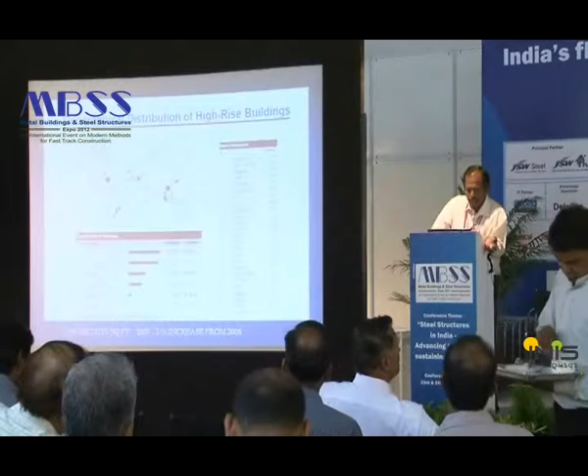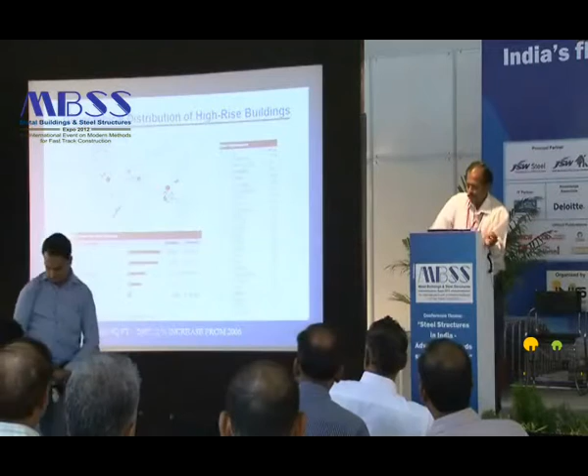And if you take an overall survey of high-rise buildings taken up a few years back, the number of buildings in concentration in Asia is the heaviest, which is almost about 33% of the whole construction industry in the world, of which if you take cities, within 25 cities in India we are ranked 23rd.

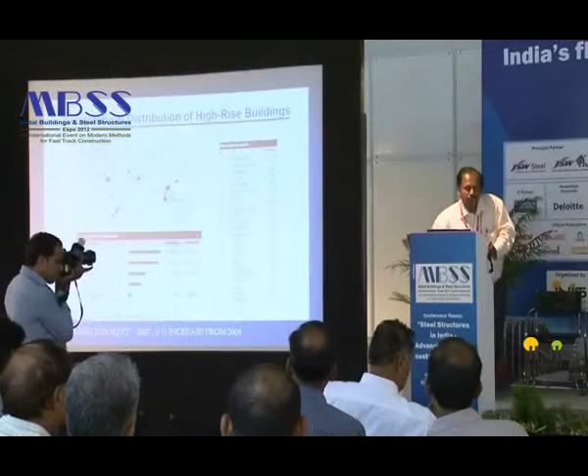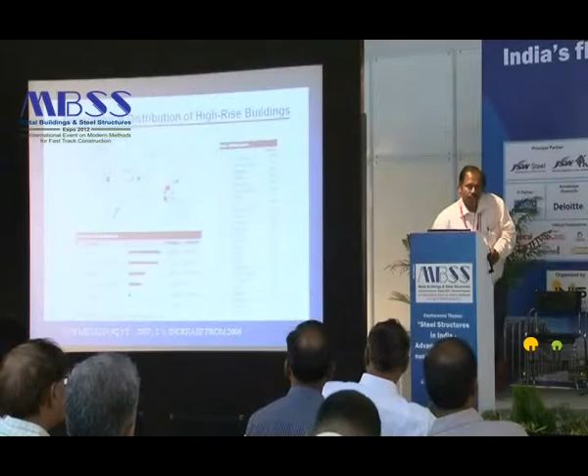It's about 470 plus towers that are estimated to be constructed, and of which, if you take commercial structures, almost everything is commercial except a few which are residential, and that is all in our present setting.

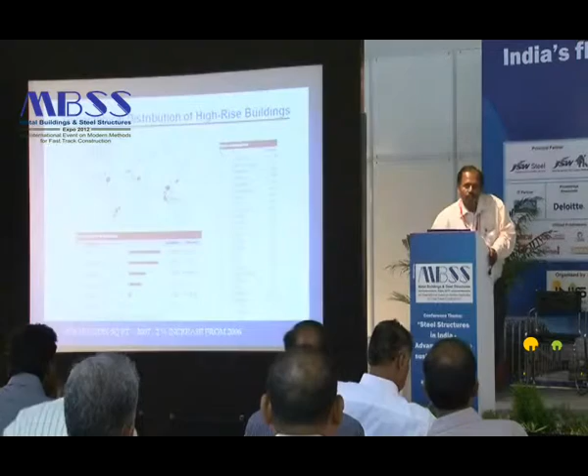The developers are right now starting to move into residential buildings in structural steel, whereas the major portion, almost about 90% of the structures, are commercial related items.

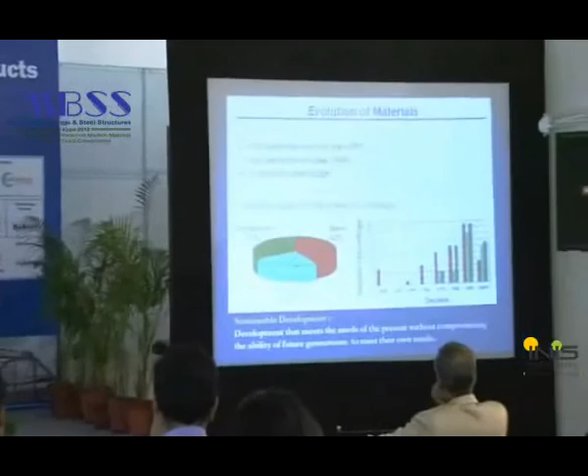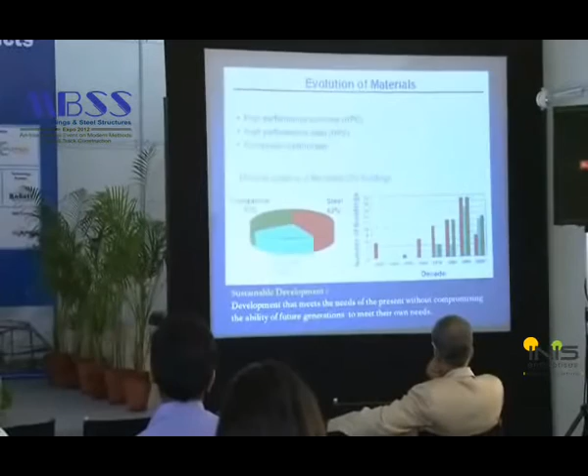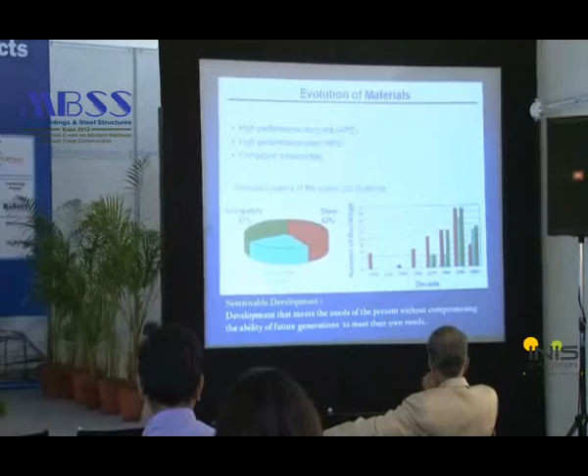And if you take material - if you see the graph or chart presented here, initially most structures started with steel way back in the 1930s, and later it was completely taken up into concrete, and in the later part, merging the two materials together, it has been taken up as composite.

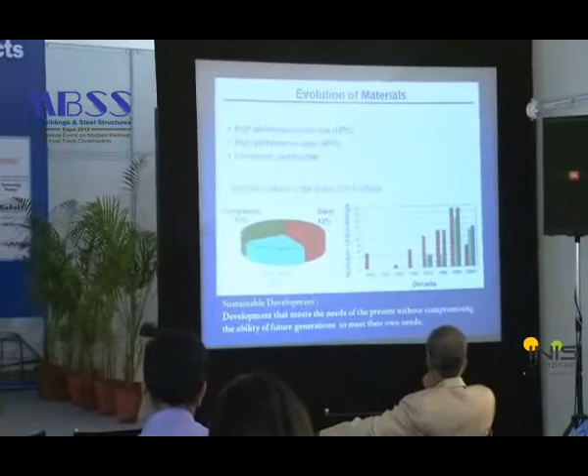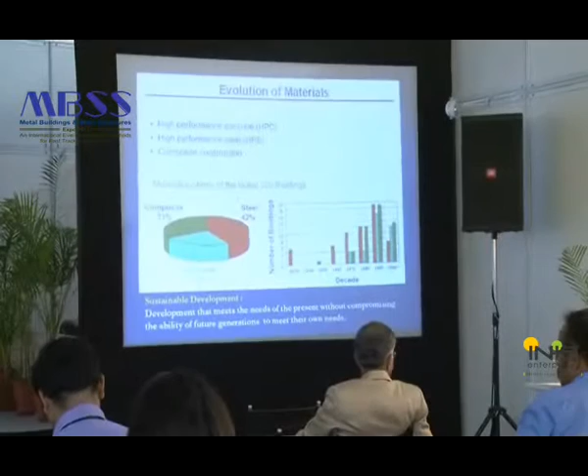Presently, according to high-rise levels, whether 20-story or 30-story or 40-story, the material which is really beneficial is being analyzed, and in most cases for high-rise buildings we have started using composite structures.

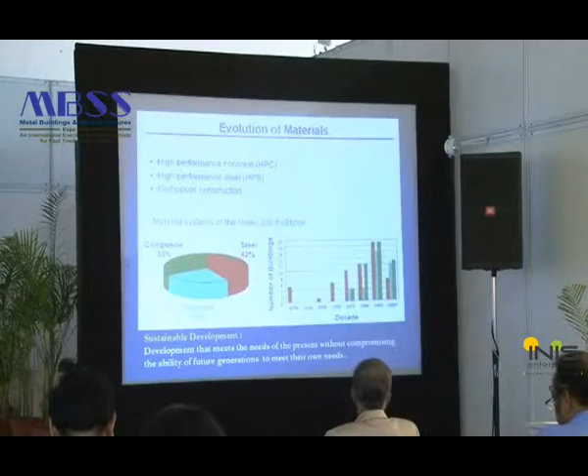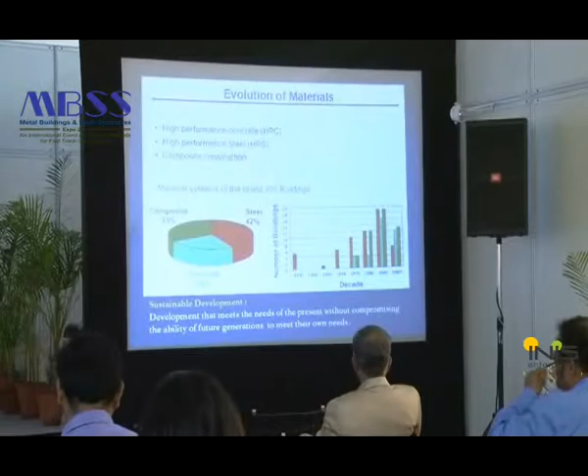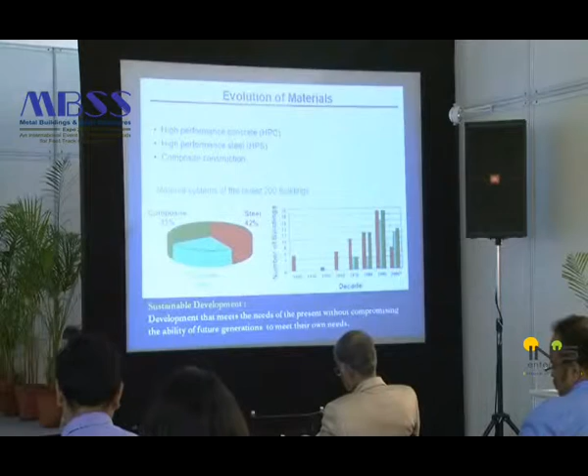If you see the subject related to sustaining growth - development that meets the needs of the present without compromising the ability of future generations to meet their own needs - this is like a green building concept, where structural steel can be a major factor, as our earlier speakers discussed, mostly into reusage of material, where steel is the best option compared to any other material.

Now in terms of commercial buildings, we go through all the projects being displayed, constructed by us. Offices - if you take one of the high-rise buildings in Singapore, Republic Plaza has been done by us. Then the Tiara Towers and the Burj Khalifa, right now the tallest building in the world at 828 meters, is also done by us.

And if you take the offices, like top left is Almas and Petronas Tower, and the most inclined building as of now in the world, Capital Gate in Abu Dhabi, and Tornado Tower in Qatar, and of course Al Shams - all these structures have been constructed as composite structures, mainly with columns either as encased columns or with concrete filled tubes, and the beams being steel, with metal decking used for the decking system, where we have eliminated the formwork.

And if you take Rose Rotana in terms of hotels, we have taken that up. On your right, on your left, the last one which is a 75-story building in Dubai, and the middle one is Kingdom Trade Center in Saudi Arabia, which is also a hotel.

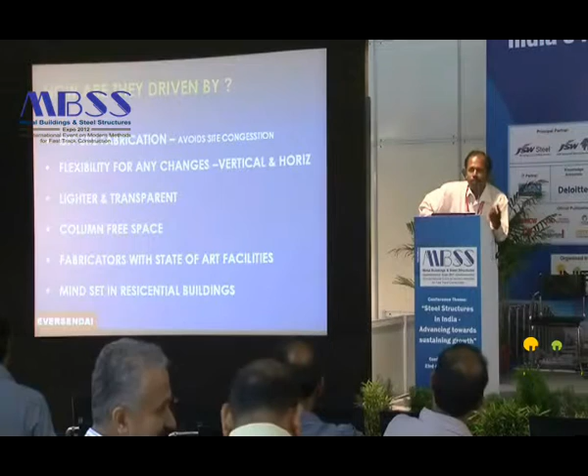With the building being lighter when using structural steel, as presented earlier, column sizes are reduced, which in turn influences the foundation. As an office or commercial building, the transfer or open space is really required.

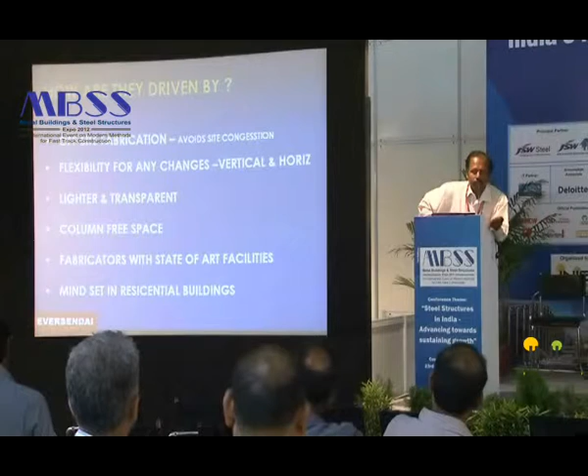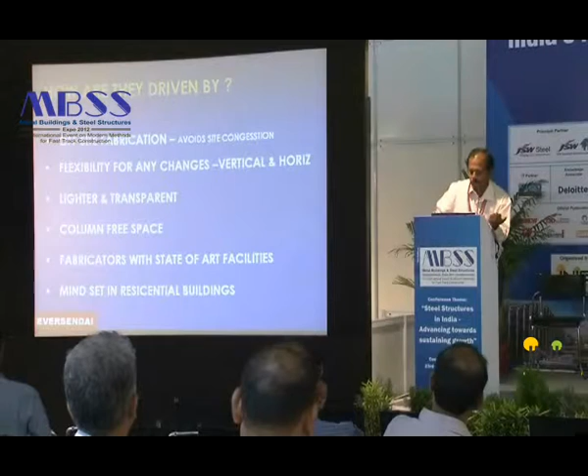Most buildings are being constructed with facades of concrete or glass, which may not be possible in residential buildings. For commercial buildings to reach that stage, structural steel plays a major role because a lot of cantilevering becomes possible, with fabricators using state-of-the-art facilities to do complete prefabrication outside and bring it to the structure.

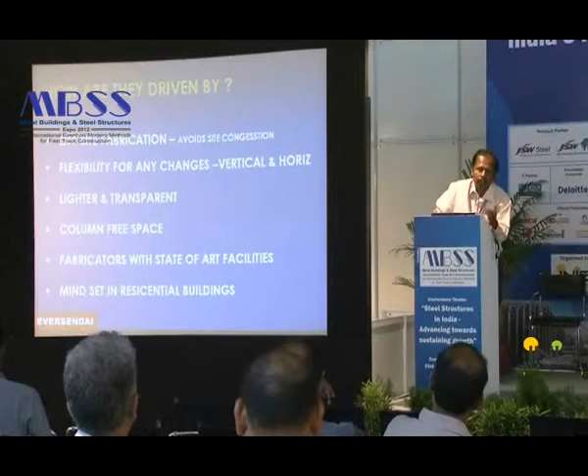Also, mindset is a major factor—we are still not in a position to penetrate to a higher level of structural steel usage in residential buildings. These are the governing areas where structural steel plays a major influence on commercial buildings.

Going back to the projects we have done, which is the Capital Gate.

This is the most inclined building in the world as of now, which is a 33-story building with almost 9,000 metric tons involved. It has been constructed externally with diagrids, and internally with an atrium opening up from the 14th floor to the 33rd floor, also constructed with pipe structures inside. A very highly challenging structure.

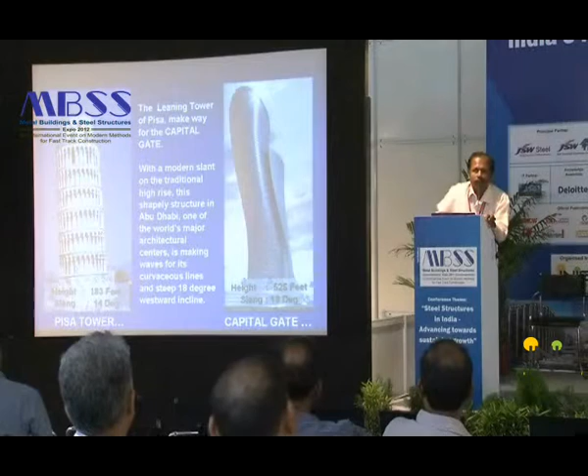If you see the floor plate, the base is about 14 degrees, whereas this goes to 18 degrees, and it is right now registered as one of the world's most inclined buildings in the Guinness Book of Records.

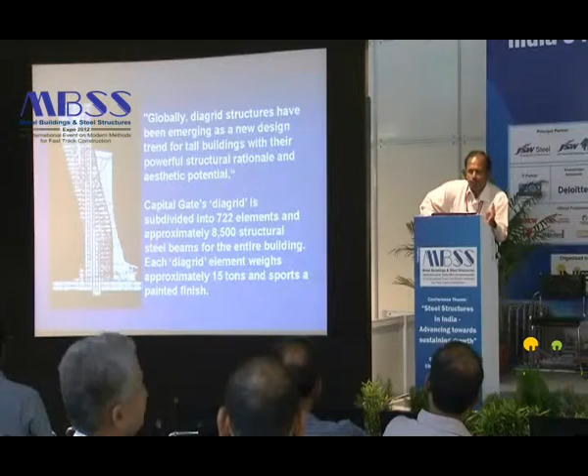So here you can see how exactly the core is being constructed. The core is never inclined, it is vertical. At the bottommost point, the core and the structural steel diagrid are almost touching, where you cannot even have usage space, whereas on the other side it extends about 33 meters outwards.

The same way in the middle, it is balancing, and at the topmost point it's the reverse case, where the core and the structural steel diagrid are very close, whereas it cantilevers on the opposite side by 33 meters. So when we are doing this, the core itself has been pre-cambered.

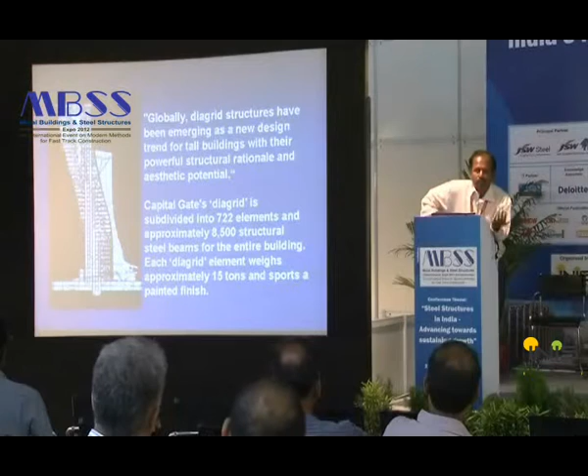They have moved the core by 330 mm, and it has been pre-stressed to take care of the counterweight as it goes up to the top. So that is the way it has been designed.

And you can see a complete Tekla model has been done by us on that, and this is one of the decks, in the middle area.

This is the external diagrid alone, which is done with box sections at the base, 900 by 900 box, 80 mm thick built-up sections. As it goes to the top, the thickness reduces, the box size remains the same, and it goes up to 16 mm.

And this is the actual structure which is constructed.

If you look at the connections, at any junction, no single diagrid is symmetrical. All the diagrids, all the junctions are different. Taking it as a surface, no single plane meets the other plane. That is the reason we introduced cruciform plates in the middle to take care of the forces. That's how it has been done.

And it's not really possible to do this in concrete. If you take the internal diagrid, it is completely done in pipes.

We erected it in segments like X, so that we always face the pipe-to-pipe junction perpendicular to that, for easy construction at the job site.

Because of the architectural reason, the entire joint site is done with welding. None of the areas allow bolting. And we have, at any point of time, more than 30 highly qualified 6G welders in the job site to do the job.

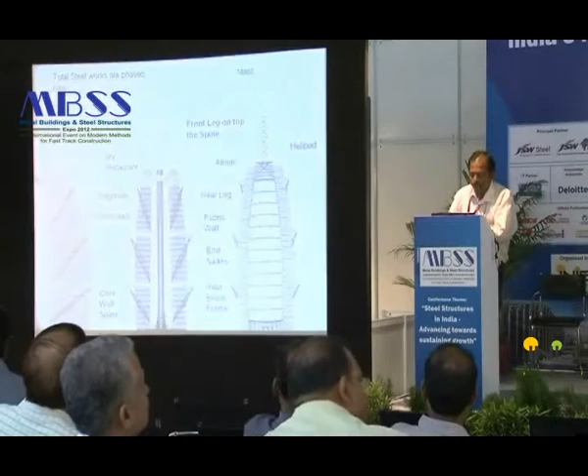This is the construction of the piece, and at any point of time the piece weight we lifted is 25 tons. All are prefabricated. Whatever you are seeing in the middle is the scaffolding or welding chair where the people have access and weld. The entire structure is welded in position.

Because of architectural reasons, bolts are not allowed, so it is being boxed. The bolt itself is very difficult to put up as a joint there. So that is another challenging job, and it was the very first job for us in the Middle East, and also for the UAE itself, with its own challenges.

The diagonal you have seen has been erected with the strand jacking method by cantilevering outside the building. The weight of the diagonal is about 180 tons, and the length is more than 3-4 trailers, transported as a single piece from the factory to the site.

What you are seeing here is in the ground position, and that structure is not assembled on the job site. It is transported as one piece on the longest trailer, and when transporting, the speed of the trailer is about 5 km per hour, not more than that.

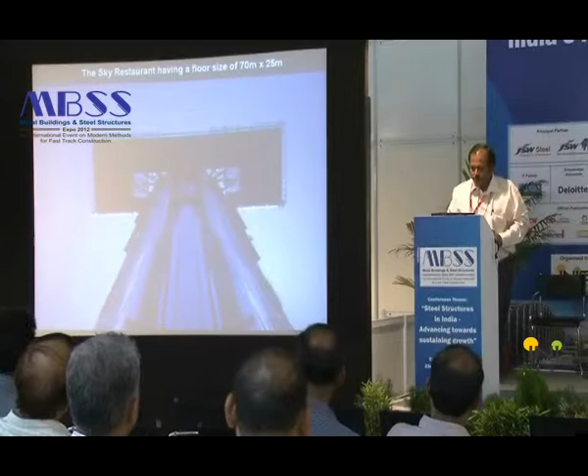What you are now seeing is the cantilever hotel, constructed on the same building with a segmental erection. You can see the cantilevering happening in the air. This is the underview of the same hotel, the Sky Restaurant, about 70 by 25 meters in size.

And this is the helipad, which is about 200 plus tons, where Andre Agassi played tennis on that particular helipad. This is another structure completely comprising about 11,000 metric tons of structural steel in total.

But none of the structure is for floor plates or columns. It is only for the stability of the building. The building itself is in concrete.

And this one is the Kingdom Trade Center in Saudi Arabia, where the overall height of the building is 300 meters. The last 120 meters is what you are seeing, like a needle hole, and it is completely non-occupant. All of the 120 meters has no floor.

So the floors are only up to 180 meters, which is completely done in concrete. What you are seeing is the 180th meter. Above that comes only the structural steel, and all of the 120 meters above is only a roof feature of the building, with a panoramic view bridge at the top.

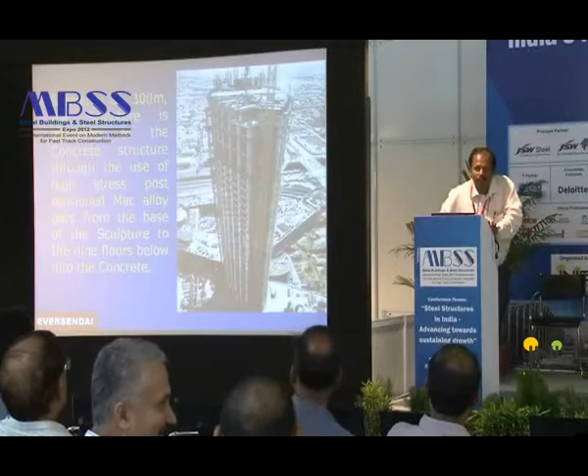Because there is no concrete on the 120 meter section, the entire structure is subjected to wind all the time and in tension, because it does not have a counterweight to balance it.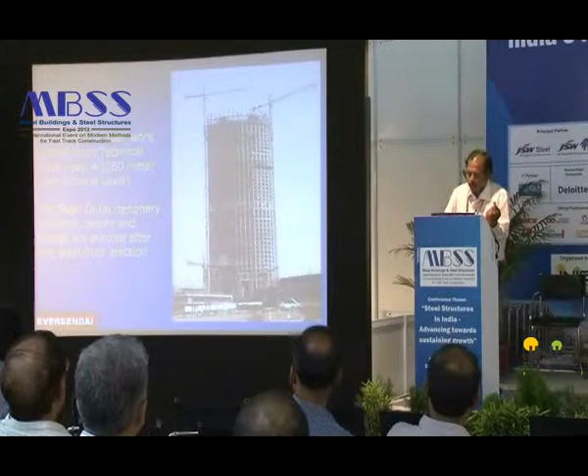When we were entering into the project for construction, the tower cranes on either side were fixed, and the tower crane can lift only 8 tons maximum, whereas the bridge at the top is 180 tons to lift as a structure alone. So we planned to assemble on the 188th meter, and then lifted by taking up columns on two other sides, and then lifted the middle portion with the bridge, as you are seeing now, with the strand jacks.

At the 120th meter, when we started lifting, the entire column started buckling. So in terms of analysis, what we did was lift in 2 stages at the 60th meter, and we strengthened the necklace bottom like this, and then lifted again to the next stage.

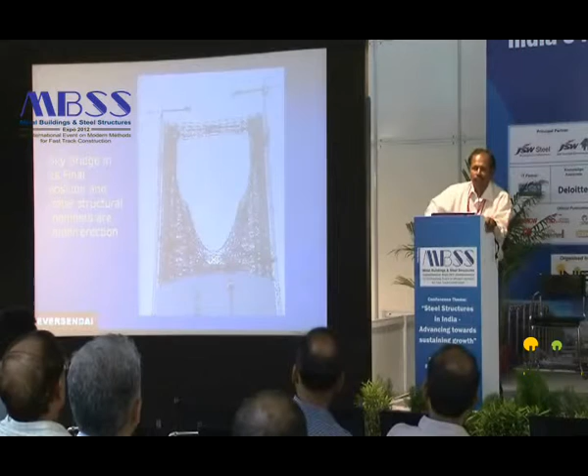When positioning, we completely welded one side to allow the other side for thermal movement, and we connected all 4 joints again, 4 corners at one time, to avoid the differential movement of the expansion. That is the way this has been constructed.

Even though we have used about 7,800 metric tons of steel here, none of it is used for the floor plates. It is only for the roof feature.

You can see one of the connections which has 13 members connecting at a single joint. These are some of the connections where you cannot even apply any of the spreadsheets. It has been derived from basic principles.

This is QIPCO Tower, which is a standard building but has its own complexity in the diagrid. This building is done in Qatar. It has a central circular core, with diagonal columns at the perimeter. The span is 14 meters from the core to the end, which is really very helpful in terms of planning an office properly. That is the reason they selected structural steel for this.

Even though one more neighboring building in Qatar has been done in concrete, completely similar in diagrid fashion, they started 6 months ahead whereas we finished 6 months ahead. That is the way it has been done.

We even did pre-assembly in our factory to check whether the pieces were matching or not. We did this in our Dubai factory and transported it to Qatar. All the floor beams even have MEP openings for floor requirements.

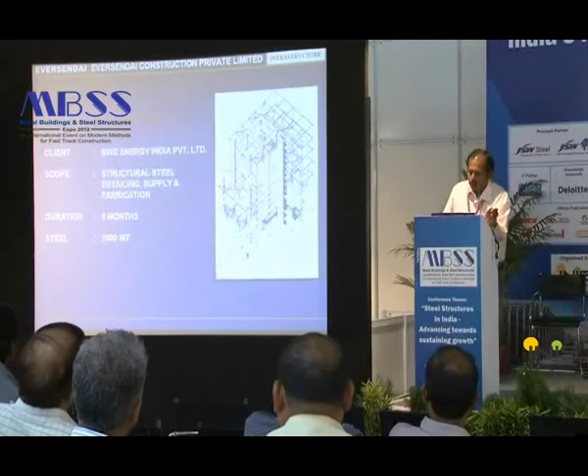Marathon Futurex is actually a 44-story commercial building, and of course there's also the power plant structure which we are doing.

When we entered Marathon, they had already done about 5 floors with concrete, and internally we needed to erect structural steel. It was quite challenging because none of the cranes could be used for our material lifting, so we went with our own method and completed it, which includes metal decking as well as concreting together. Right now the structure is waiting for its next level of approval.

As our friends mentioned earlier, doing it in 24 or 36 months is fine, but the problem we face in India is approval from high-rise committees. Once it's very clear, construction of the building is not at all an issue.

In terms of steel, we can do a 3 or 4 day cycle for the structural steel columns and beams, and 6 days for the core. In the 67-story building I mentioned earlier, we are using jump form techniques for the first time in India, which is going to achieve almost a 6-day cycle for the core per floor. That is what we are aiming for.

So international technologies have been incorporated, and construction is being started in India with that kind of approach. Time is not at all an issue; whether we are looking at the proper overall integrated approach is the question now.

In terms of fabrication, this is our Dubai factory, this is our Sharjah factory, which has all state-of-the-art facilities, and this includes a pre-assembly yard. In India, we have a factory in Trichy, which has...